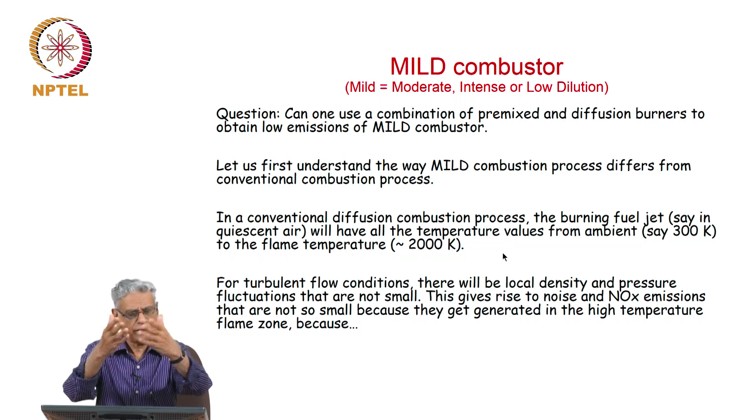In a conventional diffusion combustion process, the burning fuel jet in quiescent air will have all temperature values from ambient to flame temperature. You have a flame, ambient temperature inside goes to 2000 and odd K, so all temperatures are present inside. If the flow is turbulent, there will be local density and pressure fluctuations that are not really small.

That is why whenever you have a turbulent flame, you will find a sound, and that sound gives you a healthy situation of the flame, if you may want to think so. But this is what gives rise to noise, because noise is essentially due to pressure fluctuations.

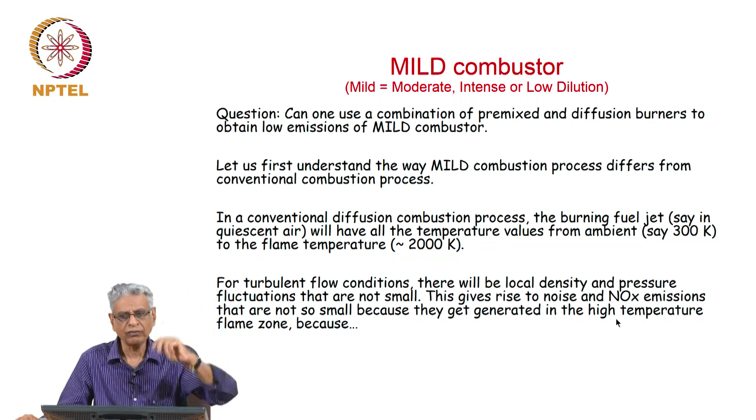NOx emissions are also not so small, because they get generated in the high temperature flame zone. When temperatures are high, it's a function of e to the power of E by RT, also related to p oxygen to the power of half and so on. So you know you will get higher NOx at higher temperatures.

To minimize NOx emissions as well as CO emissions, the standard rule is that you must walk through a temperature range not far beyond 1900 K, perhaps closer to 1700 K, to make sure both NOx and CO are within limits. And as I mentioned, NOx is related essentially to the Zeldovich mechanism, which we discussed in the earlier lecture.

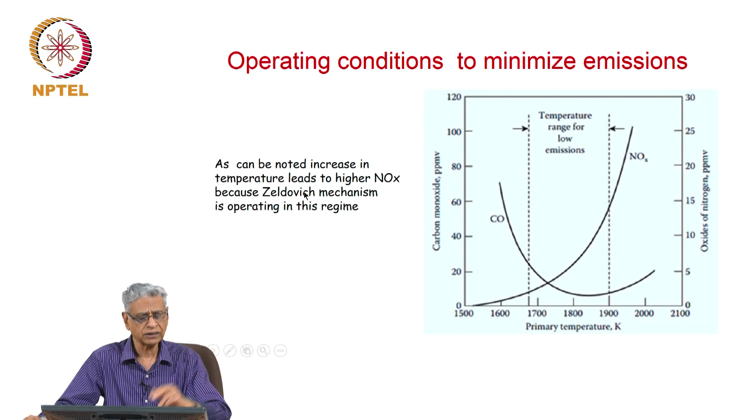Okay, I will tell you about the mild combustor. From one of the studies, what you see here is this: you introduce fuel and oxidizer keeping them separate, you do not mix them at all. So you have fuel inlets here, oxidizer inlet here. Bring up the combustion system to high temperature, say more than 1000 K.

Now, as it is operating, reduce the exit area to a level such that the flow recirculates within the system. Please do not worry about this feature, it does not have to be present, it works without that too. So the flow that goes out recirculates here because you are reducing the cross section. These hot gases recirculate and dilute the high speed jets of fuel and air, so their temperature increases, but fuel and oxidizer concentration comes down.

You see here you have fuel jets and oxidizer jet. I have shown this to be small because the flow rate of fuel is small compared to oxidizer, and the hot gases around, due to the high injection velocity of oxidizer or fuel, get into the system, and this causes mixing. As it goes up, you will discover the oxidizer gets diluted, and so does the fuel.

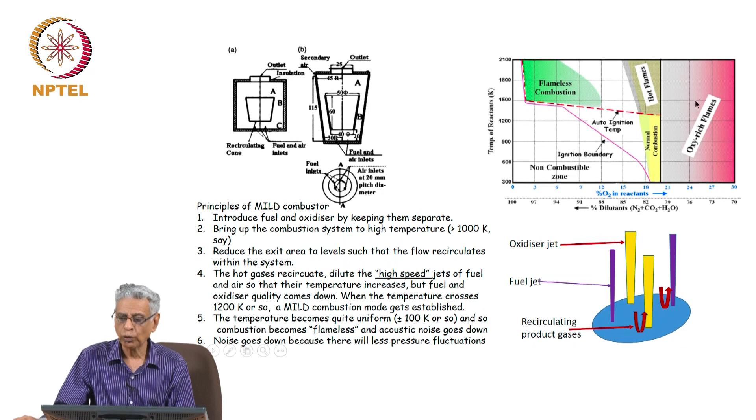So you will find that in the range of oxidizer fraction and temperature of reactants, there is one normal combustion at 18 to 20% oxygen. You can also get hot flames if you use reactants at higher temperature, and this is the mode where there is flameless combustion. If you increase the oxygen fraction much more, you get oxy-rich flames, and this is one mode used in the industry, okay.

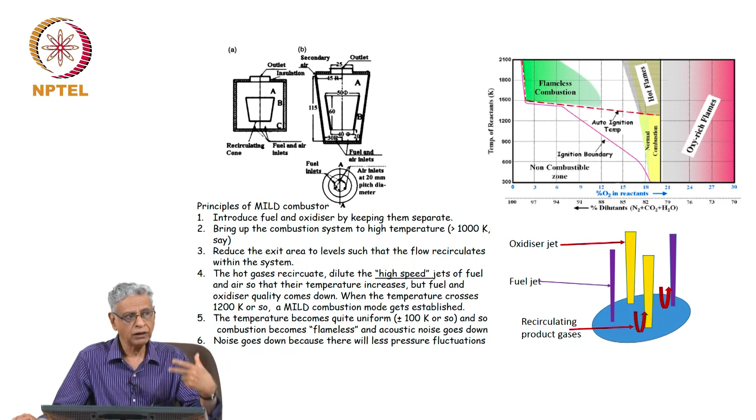Particularly when you want to melt steel or do things like that, oxy combustion is used. If you look at a comparison of different strategies taken from literature, you will discover you have four cases.

Lean premixed - let me explain why this is used, related to the question which was posed. I can go lean and mix it, premix it, so that the combustion process is clean, with no diffusive combustion. So there is one mode which is competing with mild combustion in terms of pollution reduction, emission reduction, particularly NOx.

Lean direct injection is also a possibility. Rich quench approach to the process of combustion. Then the flameless based approach, which is what mild combustion is about.

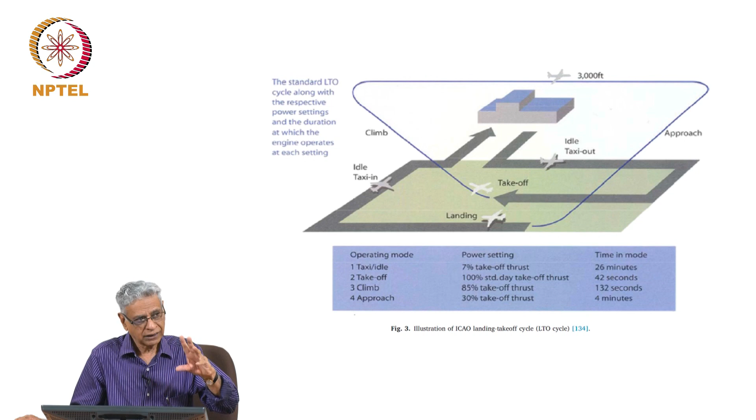So with this situation, if you look at the literature, you will see that the NOx allowed for is a function of pressure, and they always talk about the LTO cycle which gives you NOx, and on that measure one engine is qualified compared to another.

So you will discover the large amount of data on premix systems is for aircraft, and the combustion system design is centered around reducing specific fuel consumption because you want to operate it in a lean mode, and that is why it is so.

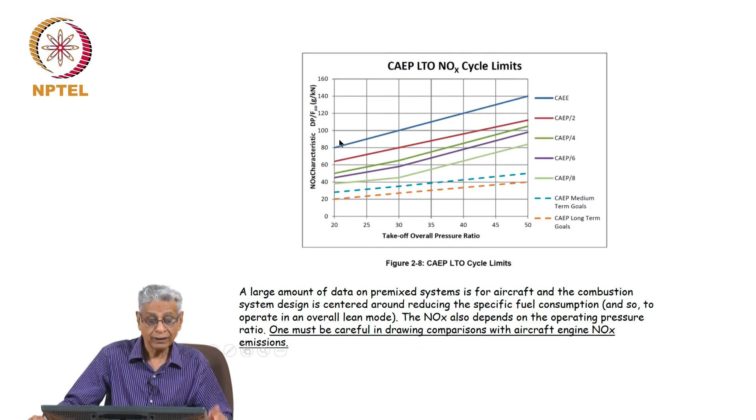But I tried to see if there are any data in premix combustors to look at NOx. There is not enough data either on mild combustors in comparison with premix systems to say firmly that one or the other is correct. I thought it would be easy to locate, but it was really not possible. It looks surprising that with premix combustors, you do not measure NOx at various ratios of leanness or whatever - it does not seem to be available.

So if one system - the only argument why mild combustor seems to be superior, from what I found, is the safety of a non-premixed arrangement. Providing industrial safety as the criterion for the choice of mild combustor, it may be a reasonable choice. I think there is a distinct case to create a safe premixed combustor which gives the same level of NOx as mild combustor.

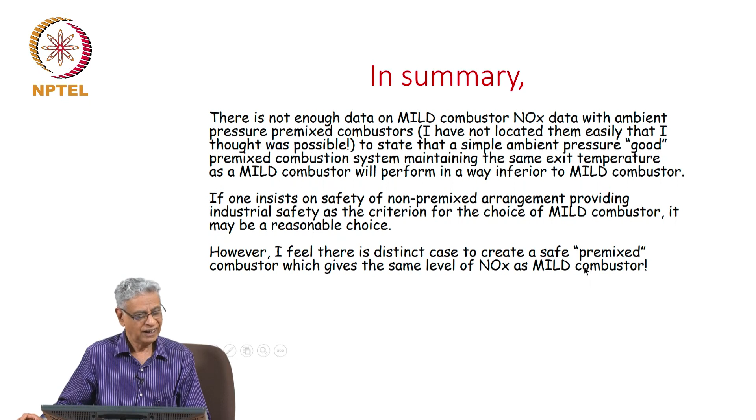In a way, I am actually disagreeing with the situation - low for lean premixed and ultra low for mild combustion. You may ask me why, so we can subject it to a little discussion.

The argument I made was: when you look at a mild combustor, you are pushing in some fuel and oxidizer in some ratio and taking it out at the exhaust. There are a lot of dynamics taking place inside, let it take place. It's not my problem to find out what happens inside. You look at the temperature that comes out of the combustor, which may be close to the premixed temperature, because

it is well mixed, there is enough time for combustion, and what you get out must be close to the premixed flame temperature for that mixture ratio. And in a premixed combustion system, you are doing the same thing. The conditions are very different though, there is no lateral change of condition when you look at a premixed combustion system. There is a variation of temperature going from the premixed state, from the initial condition to the flame temperature. There is a sharp domain of the flame thickness.

So I can't find enough arguments to say why a premixed combustor cannot perform as well as a mild combustor, and I do not find any data in the literature that I can lay hands on in the last few days to say one thing or the other. So I leave this question at that point, and there is some opportunity for somebody to do research to settle one thing or the other, because there is too much hype around mild combustors. In some ways I am a part of that. I was there in a lecture at an international symposium when a German person presented it. It looked exciting, so Sudarshan Kumar, who is now a professor at IIT Bombay, did his PhD on this subject. But I no longer am able to defend that position at this moment. I am being honest with you, and therefore there is some case for doing a careful study on this subject.

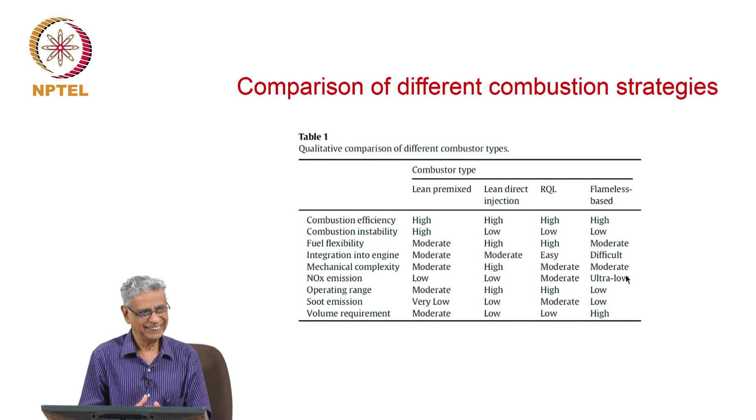I will switch over to a question asked by Kalyani, though it's not exactly what he asked. He asked about the G parameter in erosive burning - how did you uncover that, what is the basis of it? I thought I would just present the paper and show what is what. Then I discovered I could enhance the knowledge value a little more by including what happens in hybrid rockets. So I picked out the commonalities between erosive burning and hybrid rocket motor burn rate. Hopefully we will answer the question.

In the case of erosive burning, what you have is a system here which produces hot gases, and hot gases pass through this. We know how much is going through, at what pressure, and you measure the burn rate here, and you know the flux and the burn rate, so you get the erosive burning component. I brought this up in an earlier presentation as well.

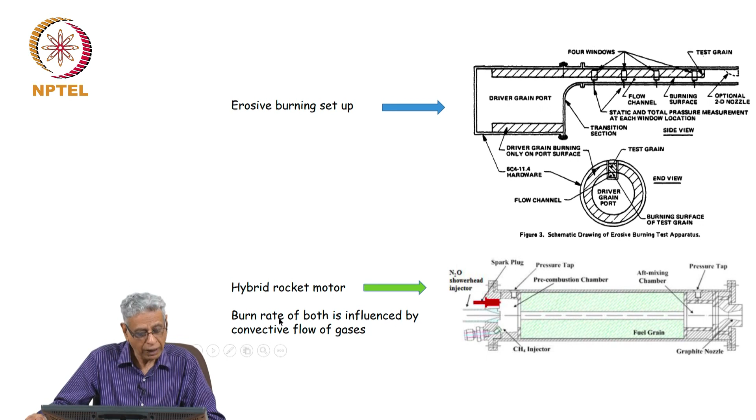In a hybrid rocket motor, what would you have? You would have a fuel block with a port, then you have an oxidizer coming in. In this case what is being shown is N2O, nitrous oxide, but the flow through this will create essentially a boundary layer next to the wall, cause heat transfer, cause fuel vaporization, mixing, combustion - that is how it happens. This behavior and that behavior are not very different. The only difference here is, even if the propellant gases are not flowing, if you ignite it, it will burn on its own - that is the difference. Here, if you do not have oxidizer, the fuel will not burn on its own. But therefore the burn rate of both these will be influenced by convective flow of gases.

I switched to erosive burning, taking it from the paper, and I also mentioned Lenoir and Robillard, which is like this: the burn rate has this non-erosive part which we have been looking at over a period of time, and this is the contribution due to convective flux. G is the mass flux, alpha is a constant, L is a length scale, beta is another constant, and rho p r is the same thing as the burn rate here divided by G.

This part is related to what is called blowing effect. I must explain what blowing effect is. When you transfer heat from the boundary layer to the surface, it vaporizes. Suppose vaporization is much more, what happens is it pushes away the boundary layer, and because it pushes away the boundary layer, the heat flux comes down. This is called blowing effect.

So you must account for this blowing effect. There is a way of accounting for it using analysis, but its behavior is expressed through this route. I must tell you, after all, this is still a most elegant piece of work, the work of Lenoir and Robillard. Now, this constant alpha is expressed in his own paper in this manner. So until this, there is nothing new that has been done.

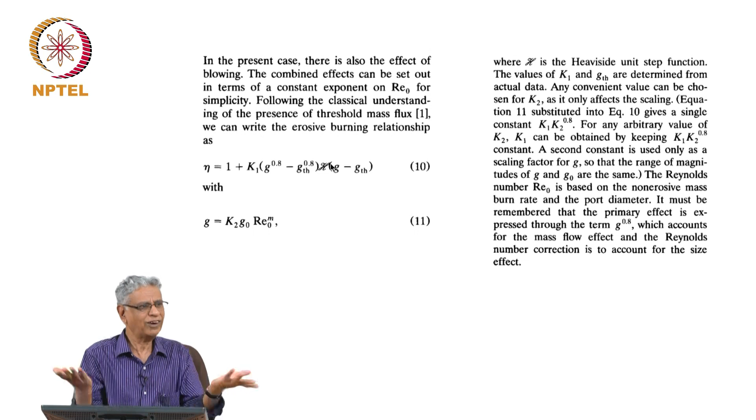So you do not need to complicate the expression with all this and include a coefficient and so on. And also that coefficient settles on its own, so that the law which you see here comes out like when you cook, you put various ingredients and stir, and suddenly you will get the food available. So it is something like that. There is not too much that has to be done. Key thing is to plot the experimental data consistently and carefully in this mode.

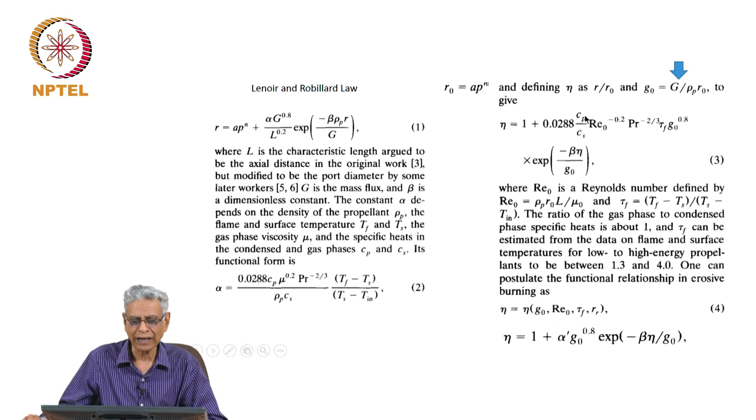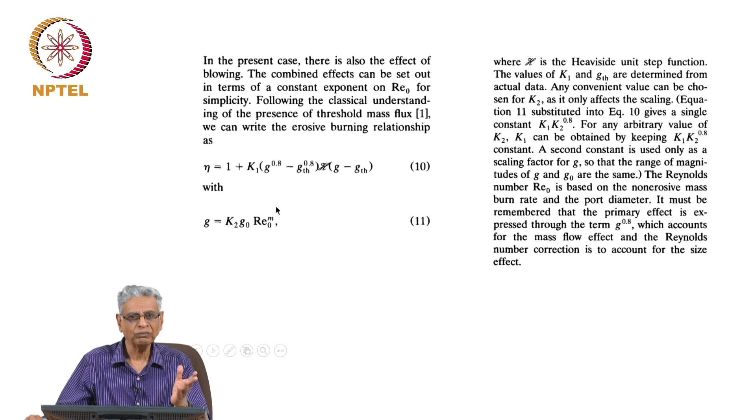That is how it has. In fact, I have been asked several times a question, how do you know 35 is right? It is not me telling some 35 is right or 45 is right, it is what the data is showing.

You are welcome to choose 38 and draw a line, no issues about it. If you take 38 instead of 35, the predictions will be slightly different, but not awfully different, because erosive burning is something which influences the pressure time curve in the early part of the burn time.

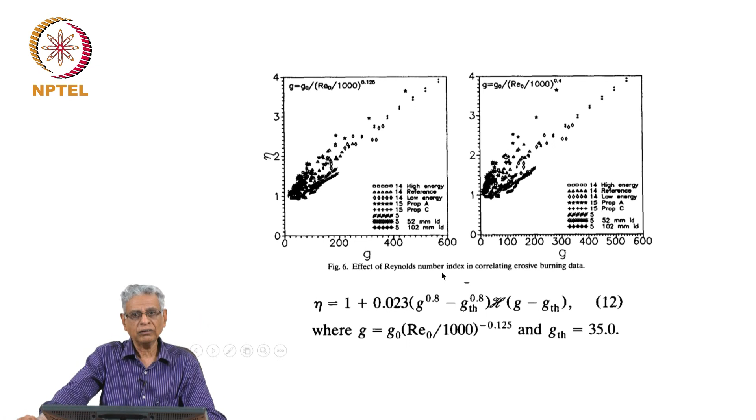So it is that you accept this, and I told you the story of what happened with non-axisymmetric grains and so on, and that is what it is.

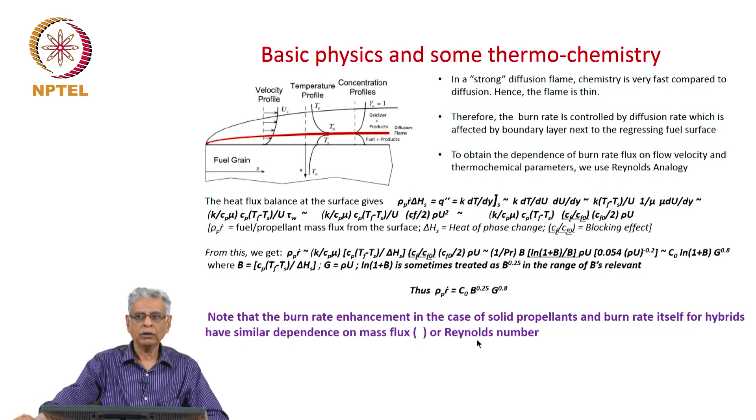That is all I want to tell you in response to your question. And should you wish to raise any questions on this or anything else, any other question, you are most welcome. We will debate them now.